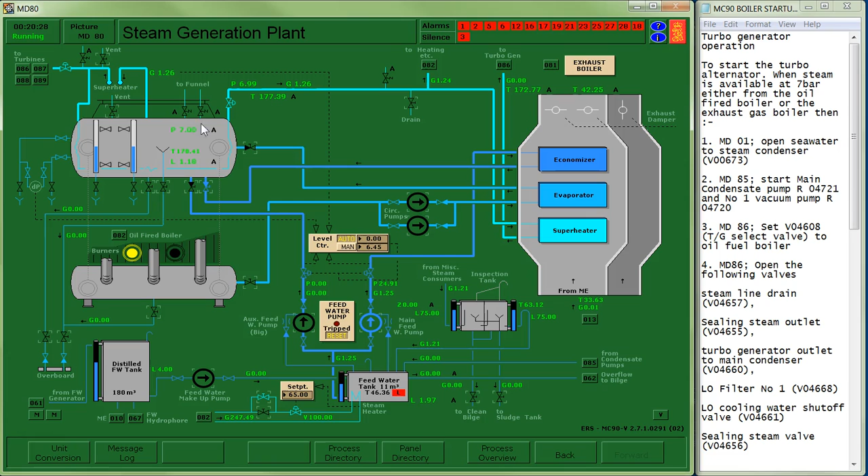So let's just take a look at our boiler plant, and over here at our steam generation plant, I can see I have my boiler, it's at 7 bar pressure, so that's pretty good. My burner is on, my water level looks to be under control. I'm able to supply superheated steam to the turbine, so if I follow through the pathway here, it goes to the superheater, which is down here, connects back through, and I've got a pathway.

Sometimes you've got to just make sure that this valve is open. It may not be open, so if you're not finding you have pressure, it might be that valve that you need to open up. Eventually that'll bring me back to 86, which is where my boiler is. Just double check on my combustion side, so burner management system is on, all of my controls are in automatic, and I'm supplying the boiler with heavy fuel oil.

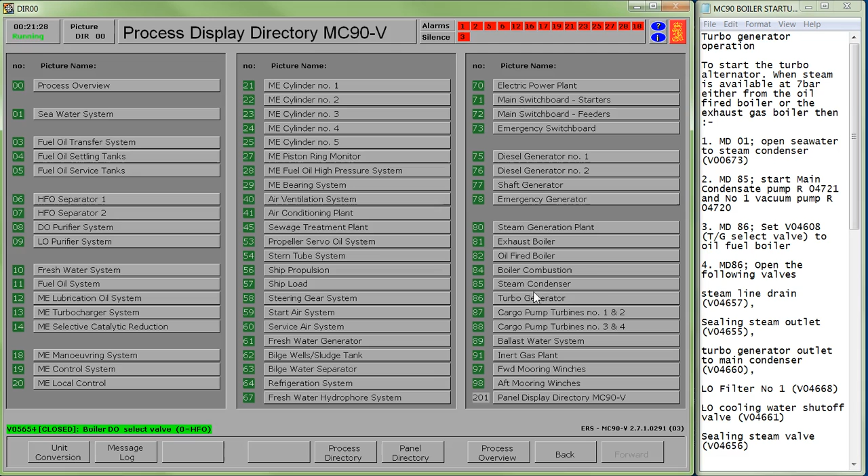Okay, so let's start going through the steam turbine startup instructions. So first thing on page 1, step 1 and 2, what we want to do is start up our condenser first, before even looking at the turbine. So here's our condenser, and what it does is steam comes in after exhausting through the turbine. I create a low pressure zone inside of the condenser, which sucks steam in. When it comes in, it gets cooled.

We know that steam has a great change in volume when it changes phase, so the phase change of condensing means it goes from a high volume, low pressure steam down to a very low volume liquid. Liquid collects in the bottom of the condenser, known as the hot well, and it can pump it back out, and it will go back to the feed water tank to then be put back into the boiler. So in order for this to function, what I need is cooling water. So number 1, I'm going to go to page 1 and get some cooling water.

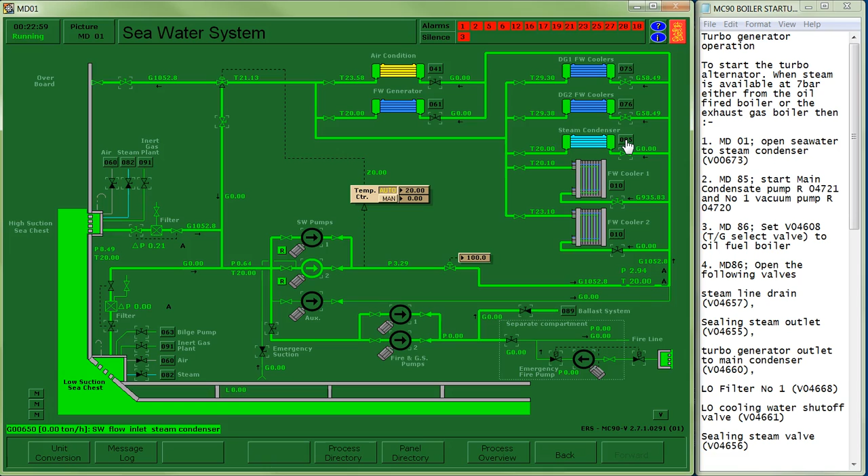So as it's set up right now, water comes in through there, goes through a pump, comes up, and in this case, looks like my valve's open, but if it's not, you'll need to open that valve, and then it passes through and goes overboard. This valve's open, but we look at it, it doesn't look like it's actually functioning, so I don't have any flow through it. I'm going to go back to 85 and notice that this valve is actually closed. So I'll open it up.

I've got a whole bunch of turbines and components that exhaust to the condenser, so I don't necessarily need to open it up all the way, but I need to make sure that I do have some flow going through. So I just set it at 25%. So step 2, start the main condensate pump, which is down here, and as well start number 1 vacuum pump.

So the vacuum pump is pulling out any gases that exist in there, creating a vacuum, and my condensate pump is draining any water that's collecting in. So right now it looks like it's pretty much full with water, and I don't necessarily want to have much water in there. So it's going to empty it out, and it's going to create a vacuum here. A couple of alarms came up, but that's not a big deal.

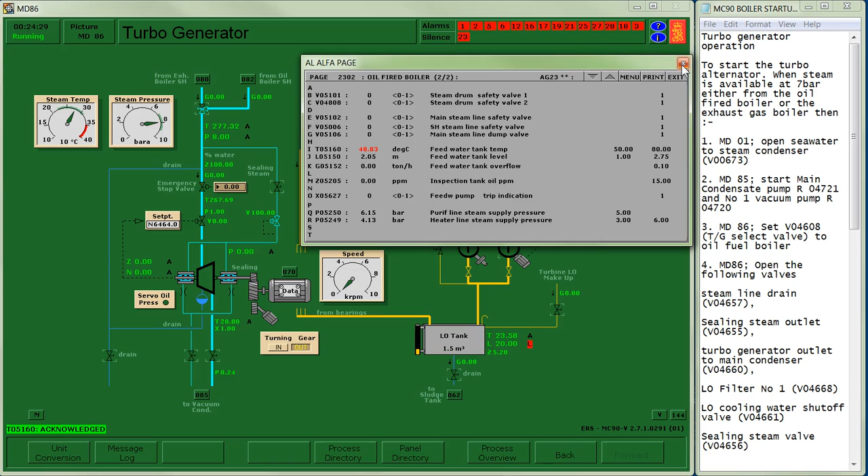Okay, so on to 86. Set the TG select valve to oil fuel boiler. So assuming that we are coming from the oil fuel boiler, which we are. If you were coming from the exhaust boiler, then you would keep the pathway here, but we want to come from the oil boiler. An alarm came up, which I believe is okay. We're just outside of the limits for feed water temperature.

We want to open up a series of valves. So what we have is a steam line drain, sealing steam outlet, turbo generator outlet to main condenser. We have lube oil filter number 1, lube oil cooling water shutoff valve, and the sealing steam valve.

Before I move on, I just want to make sure that everything is doing some sort of purpose. So I've got drain. What that's doing is I'm starting to warm up my steam line, and any water that would have collected ahead of my emergency stop valve is able to drain out. As well, new steam is coming in and it's going to heat up my line so that by the time I open this guy up, I'm not going to have as much risk of water moving its way into the turbine.

I have a sealing system, so what I'm doing is I'm supplying steam to some steam seals, and what those guys are doing is a couple things. One, preventing steam from leaving the turbine, so when I add in my pressured steam, it's not going to escape through the shaft. The other thing that it's doing is it's creating a seal that's going to prevent air from getting in. So not only do I want to make use of most of my steam, the condenser is operating at vacuum, so this guy's open to that vacuum right now. I don't want to just suck air in, so it'll replace it with steam. Those guys eventually drain out to the condenser.

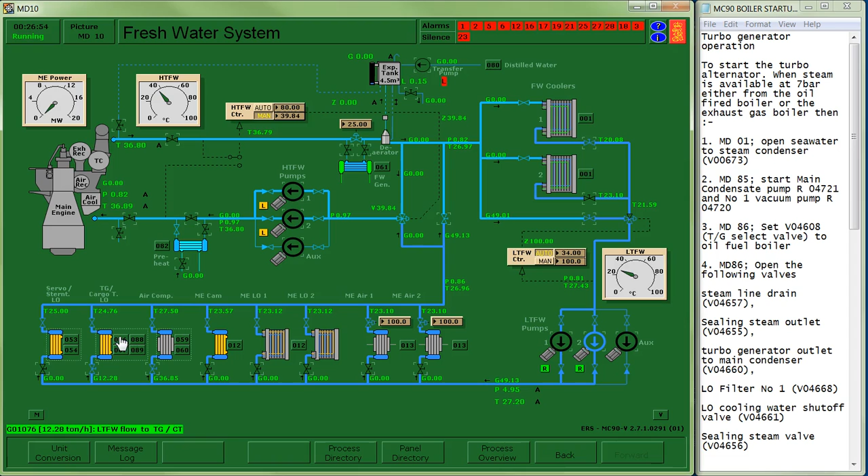And I have a lube oil system here, so that's going to allow me a pathway. And I've got my freshwater cooling system. If I look at here, this guy, again, same as the condenser, doesn't seem to be functioning. So I'm going to come back to number 10 and troubleshoot what the issue is. I have a cooling water system here, which goes through a number of distribution pathways. The one that I'm missing is going to the turbo generator. This guy will come up and around, either cool or be recirculated and pass through. So I see I have some flow going back to 86. I can see that I have some cooling water flow.

Step number 5 is a little bit goofy. Check the level and water content of the turbo generator. What I think it should have there is turbo generator lube oil. So my lube oil tank collects some water over time. So just anywhere that it has an interaction between steam and the lube oil has the ability for that to pick up water. Over time, some of that should settle out to the bottom of the tank. And so before I start up this system, what I want to do is make sure I've drained some. And now that I've drained some, I know that my level's a little low, and I'm going to fill up my level.

Step number 6 is going to be to place lube oil pumps in auto. So I've got my level into the OK range. I want to make sure I remember to close that off so I don't overfill with oil. And I'm going to turn my lube oil pump into auto. See that I've all of a sudden got flow and pressure, which is going to supply oil to my steam turbine.

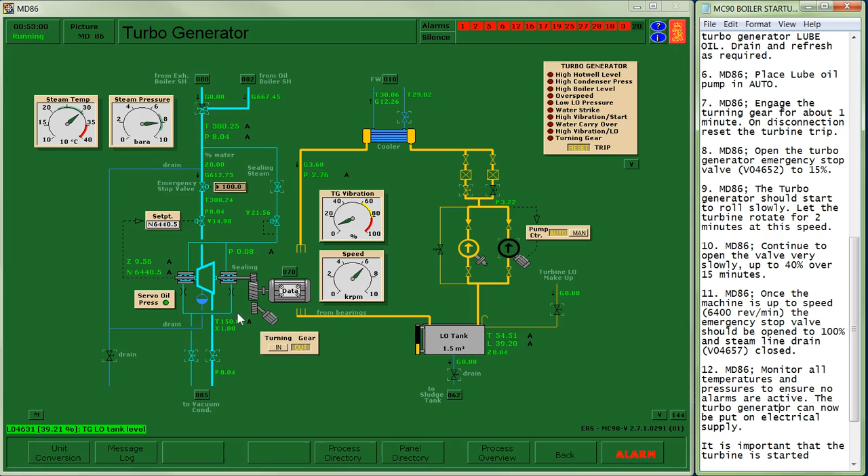So I'm up to 100%, close my steam line drain, and now all of the flow is moving through the turbine. Monitor all temperatures and pressures to ensure no alarms are active. The turbo generator can now be put on electrical supply. So what I'm confirming is that I do have the cooling water system running on my lube oil. It is seemingly happy and under control with the temperatures and levels. I've got flow that comes through. It only goes to two places, either down to the turbine or else into the sealing system.

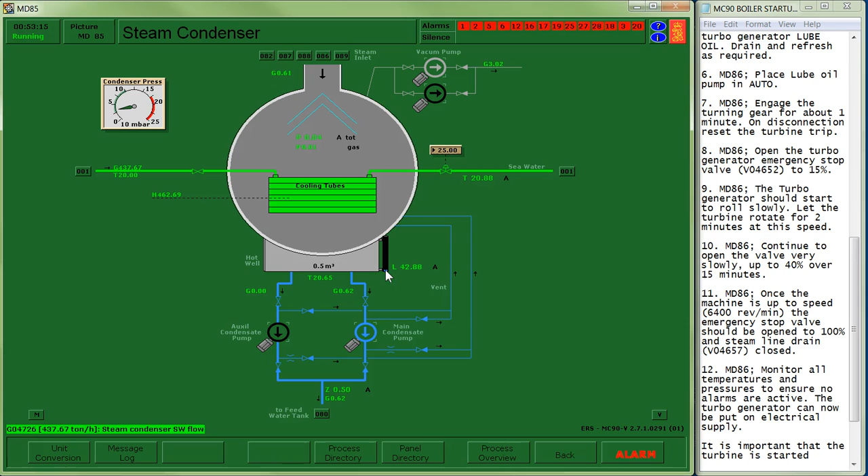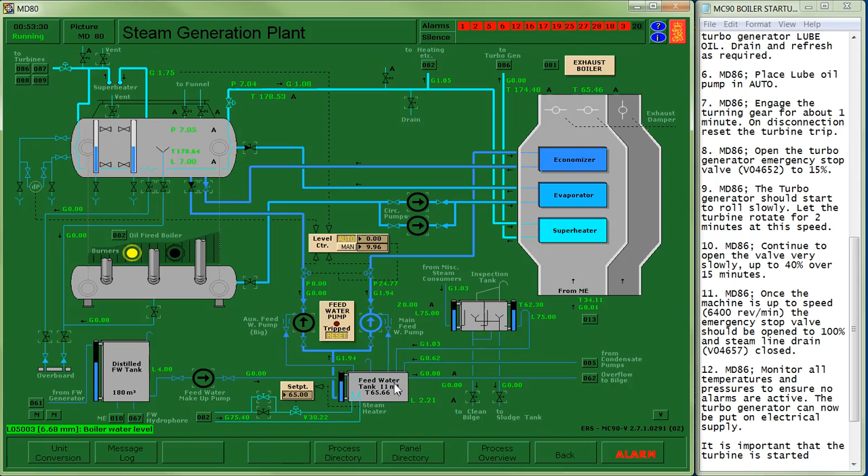Makes its way to the condenser. I'm happy with flow through the condenser. My pressure is down basically to almost a complete vacuum in the condenser. I'm not overflowing in my hot well. And I also want to take a look at my boiler. My pressure seems to be stable and looks like my level is still under control. Haven't run out of water in my feed water tank, and my combustion system is not showing any trips. So at this point, what I can do is I can connect to electrical supply.

I've brought up the synchronization screens, so I have page 142 and making use of the second monitor. Sorry, it's a little tough with the screencasting, but 144. So set up your two monitors to have both screens showing. This one's talking about the turbo generator. Right now, in order to activate it into the electrical system, I'm going to turn on my excitation. And what I can see is that I'm really showing frequency. If I want to see my voltage, I could look at a reading between the different phases. I have a governor here, which essentially controls the governor valve on the turbine, allowing more steam or less steam in. And I can adjust my frequency.

Over on this page is the synchronization panel. And what I want to do is I want to switch my panel to turbo generator. And there's a couple things that I'm interested in here. What I'm looking at first of all is the synchroscope, and what this is telling me is when is it safe for me to connect the generator to the grid.

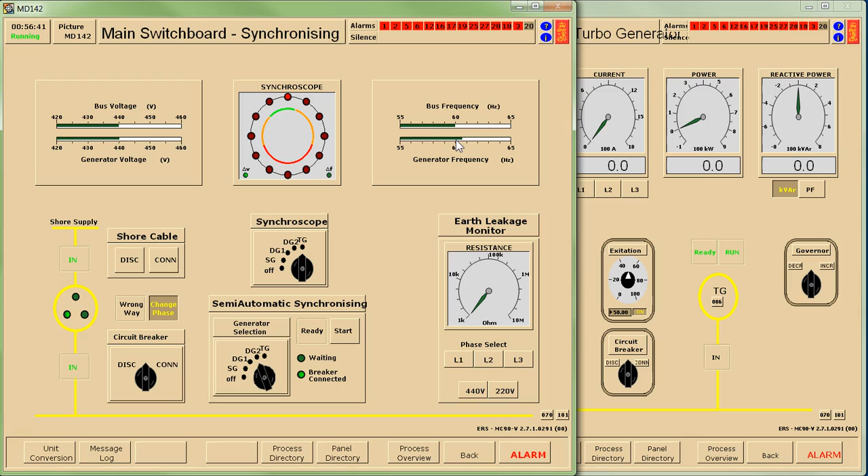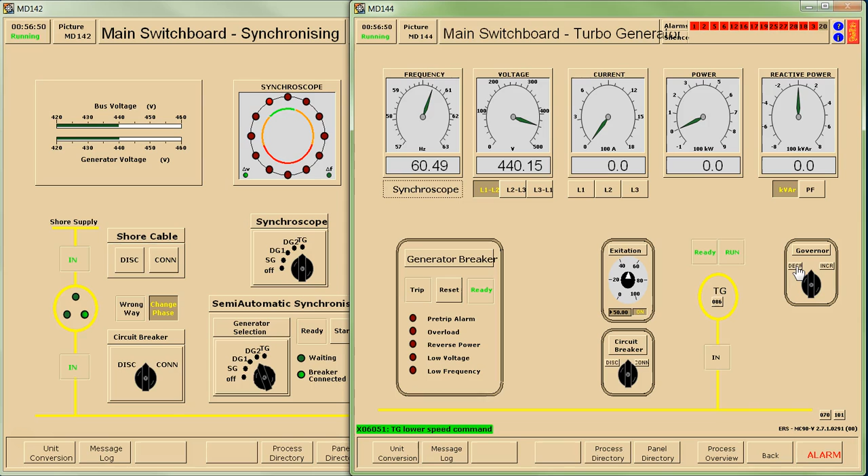Right now you can see that red dot's really moving around quickly, and why that is is because my generator frequency is quite a bit away from my bus frequency. And so what I want to do is I want to adjust my governor to get myself close to the bus frequency. So decrease, decrease, decrease. You have to click it on and then click it off.

So some students have issues with connecting it or using the governor. It's a little sometimes confusing the first time you've used it. What I want to do is I want to get myself close to my bus frequency, and my bus frequency in this case is running at 60 hertz, 60.00, and where I am is 60.11. So I'm a little faster, which I want.

I want to make sure that when I connect in, this guy is going to be producing some electricity. It's going to be acting as a generator. What I don't want is for my frequency to be a bit slower, meaning the grid will have to push it to accelerate. What that means is that it would act as a motor. Well, I want my generator to be producing electricity, so I want it to be going a little bit faster.

I don't want it to be going too fast though, because what's going to happen is when this syncs to the grid, it's going to lock into the grid speed. So I want it to have to decelerate a little bit, but I don't want to have a sudden jolt. The bigger the generator, the closer I want to be with this, but I still want to leave a small margin for error. So in case this scope is off in terms of its calibration, I want to make sure that I'm not going to backfeed power.

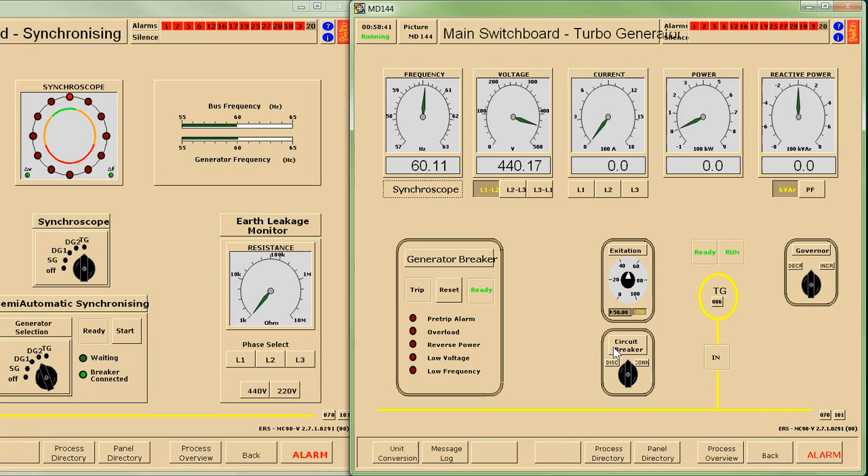So I'm going to wait until my synchroscope gets into the green zone now that my frequency is a little bit above. And when I do, I'm going to come over to my turbo generator page and hit the circuit breaker connect. I'm not using the connect over here on the synchronization panel. I want it off of the turbo generator panel. So you can see I'm in the green zone now, and I'm going to hit connect.

What just happened is my frequency locked into 60. My power I'm starting to produce, and I have some other components here that I'm able to see. I'm creating a bit of current. So it seems like all of a sudden my generator has woken up and I'm producing some power. I can increase or decrease how much power I create now.

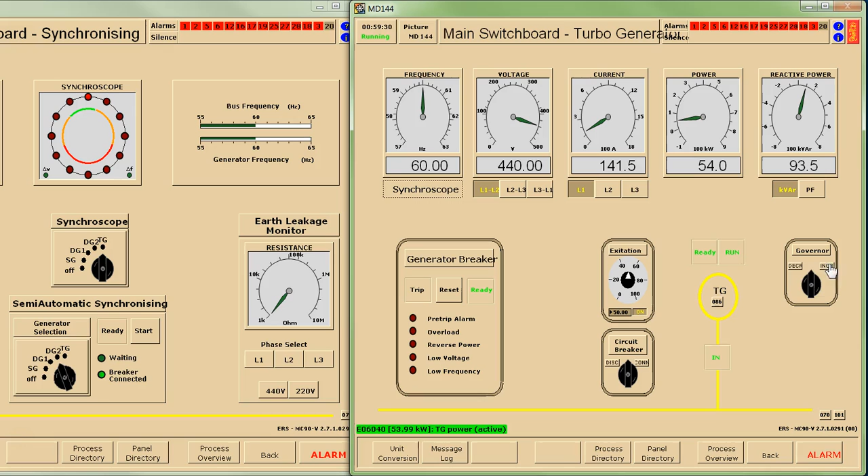So the role of the governor now, and I'll bring up the steam turbine page. Put it behind. You can see that my governor is going to control that valve. So if I increase my governor, two things are going to happen. One, I'm going to open up this valve, sending more steam through. And two, that turbine is going to end up producing more power for me.

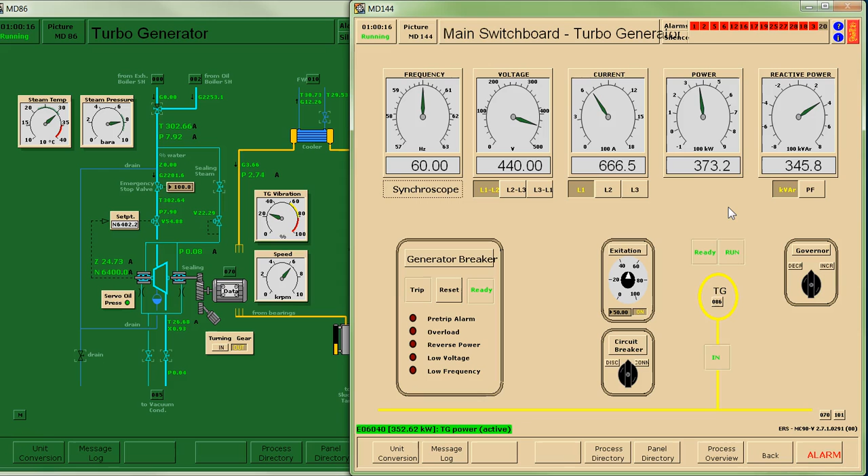So if I increase, you can see that governor valve's now up to 35%, 40%. And at the same time, my turbine has produced more power. This is something that I normally would want to adjust slowly. So in small steps or ramping slowly, because I'm going to need to give my boiler a little bit of time to adjust. So keep up to pressure, adjust level, and as well give my condenser and turbine a bit of a chance to adjust to changing steam conditions.

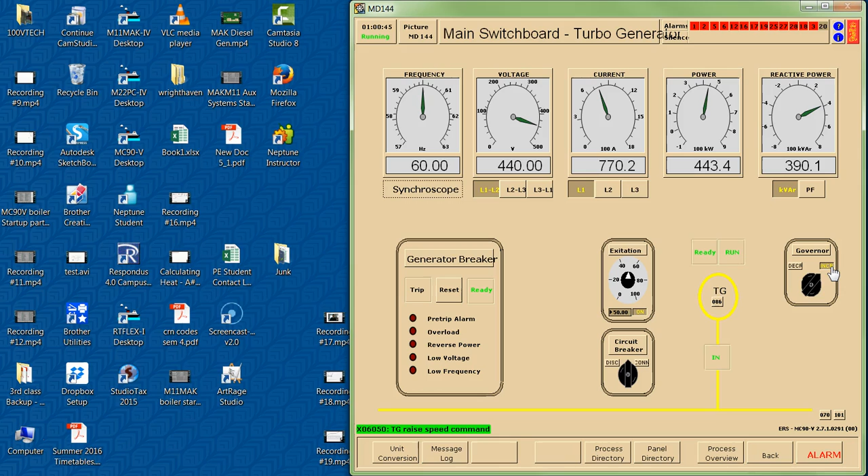So we're going to bring my power up. Say we want to reach eventually up to, say, 500 kilowatts of output. And I can confirm that I'm producing power if we go back to page 70. And where that's going is either to supplying energy to the rest of the systems on board the ship or in the plant, or else in this case, what I've set up is that we're supplying power to the grid.

So we've created our power plant cycle going from boiler through turbine to condenser and returning back, and the product that we're producing is electricity.